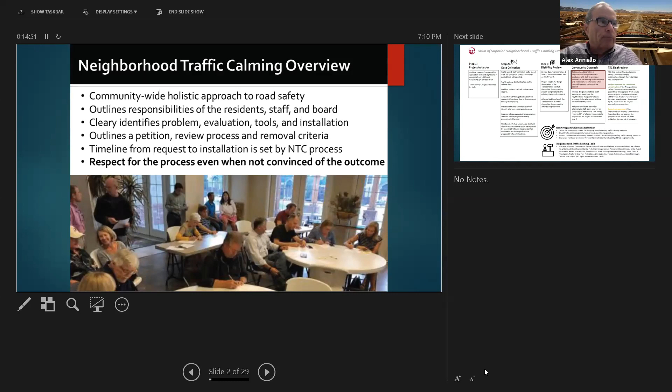I know you're all probably frustrated because you probably started this process well over a year ago and we haven't gotten very far. Obviously COVID got in the way, but we really want to get buy-in from the neighborhood. We don't want to put some devices in and then have an uproar, backlash from people that don't like them. So we want you to help us identify what measures to implement and get the buy-in from your neighborhood. We'd ask for respect for the process, even when you're not convinced of the outcome. We want you to voice your opinions, to let us know if we're on the right track. We're here as resources, facilitators, experts in how to design traffic calming measures and what their effectiveness would be.

So this is the flow chart for the process. It begins with project initiation, and your Stan, I think, kind of spearheaded putting together the petition. So we received that. We collected data last fall. So we've collected volume data, speed data, crashes, all sorts of stuff. We'll be showing that to you in a minute. We reviewed the eligibility based on the speed data, whether this program is eligible. There are some marginal criteria that may or may not have been met. We presented those to the Transportation and Safety Committee back in December last year. They gave us the go-ahead to go out and do outreach with the neighborhood to work with you to come up with a traffic calming plan.

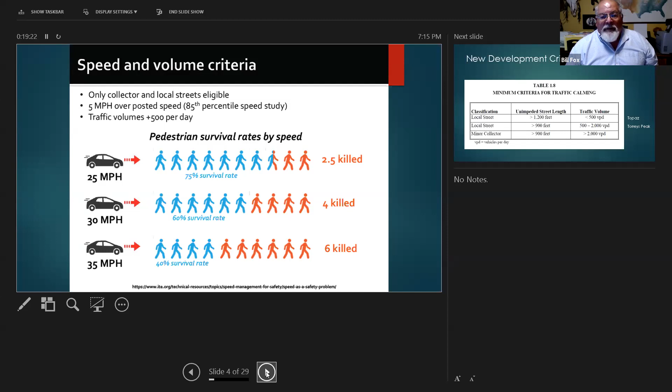The speed is related to kinetic energy. Kinetic energy is a function of the square of the velocity or the speed, so it's not a linear relationship. The faster cars go, you're much more likely to be injured or seriously injured. And so this is why we think it's so important, and you think it's so important, to mitigate speed within your neighborhood.

So just the history of your development there, and in the 70s and 80s and 90s, when the suburban developments were being developed, we had cul-de-sacs. Everybody likes to live on a dead-end cul-de-sac, which means traffic builds on other streets that are called collectors. And we would design speeds. We want to pick a design speed, and often on a local street, we want a 25 mile an hour design speed. Well, we build in factors of safety. So when you do curves and other things, you have a factor of safety. So you end up with a street that you can easily go 30, 35 miles an hour.

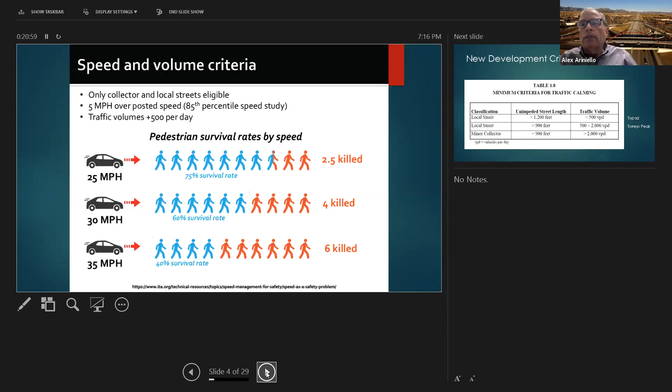You don't have design controls to limit speeds. It's really to allow traffic to go in wet weather and to not lose control and so forth. That philosophy is kind of changing, and people are looking around the country: hey, we need to design streets from the get-go with traffic calming in mind to put limits on how fast you can go. A good example, if you go to downtown Superior, we have a number of design controls. We have all-way stops, we have raised intersections, we have neck downs, we have a number of controls where we've built in the controls to really limit how fast you can go.

This particular graphic is a criteria that we developed about 15 years ago, and actually put it in our design standards to look at unimpeded street length. If you think of some streets, if they're very long and there's no reason to stop, like an all-way stop or a speed bump or a really tight curve, you're gonna get speeding if you get on a local street more than 1,200 feet of unimpeded street length. And then there's some volume criteria, so you really want to look at how long the street is and how can you interrupt that unimpeded length so you force traffic to slow down or come to a complete stop. And so overall, the speeds will stay in that 25 mile an hour range.

Now, you may know of other crashes, but they were probably not recorded in the data that I've been able to obtain. So it doesn't look like you have a significant crash history. But again, we don't want to wait till a serious accident occurs. We want to make sure that we do something that limits speed, to make sure there's protected crossings and so forth.

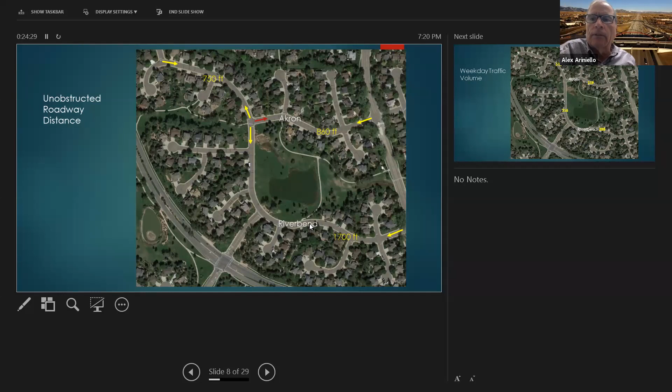On Akron, from Coal Creek to Riverbend, it's about 860 feet. So it's getting close to the 900-foot criteria that we had. And then on Riverbend from Akron over to this other stretch of Riverbend, 1,700 feet. So that one stretch of Riverbend meets our unimpeded length criteria, where we probably want to put something in there to slow traffic down. The others don't, although Akron is getting close.

Our traffic volumes. So we took traffic counts in November of last year.

Okay, if you have a specific question, let me know. So the volumes on Riverbend around the Montgomery Court area are about 510 vehicles per day. That's total of both directions. This is Montgomery Court, right? Right here. Yep. Okay. And then Akron has about 360 in this area where we counted it. Riverbend, 356. That's an average of a couple of days of counts. I'll show you a little more specific breakdown in a minute. And then Riverbend was 280. So the volumes aren't real high.

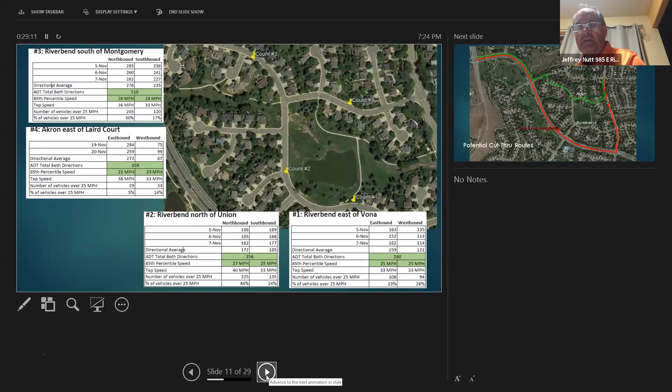Hey, Alex, Jeff Nutt. I apologize. I have to leave the meeting, but I can get the notes from my neighbor Stan. Sure. Catch you on the next one. I apologize for that. No problem.

All right, we're going to talk about, I know Stan or someone had mentioned the issues of cut-through traffic and how people, maybe people from the Amherst neighborhood or Waldona neighborhood, are using it to cut through the neighborhood. So I asked Bill to do a little analysis of whether there is attractiveness for a cut-through route. So Bill, can you go through that, and I'll try to explain all these lines on the

map. Sure. So in this graphic, we asked ourselves, if you lived in the Amherst neighborhood in the upper right-hand corner there where Alex is indicating, how likely would you be to cut through the neighborhood on Akron, say to go to Costco, or would you go down Coal Creek Drive to Rock Creek Parkway and stay on a minimal neighborhood cut-through route? And so we calculated what we thought the time and distance and number of stops and turns would be on both of those routes. And we concluded that the red route, Route 1, was the longer route, but the one that's less likely to be considered a cut through.

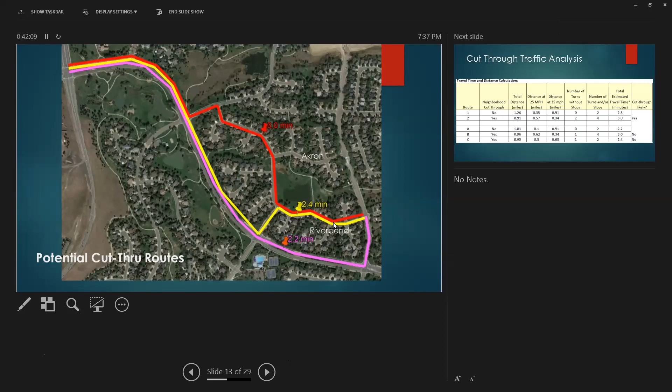Yeah, this is Greg Tan. I'm on that little yellow stretch of Riverbend that we were just talking about. And my observation is that I think there is a bit of cut through coming from the east side of Coal Creek there because of people trying to avoid that stoplight. I can't say how much there is, but I, in particular, know that there's a dude with a really loud Harley that likes to ride at 6 in the morning.

So I know that from my observations, and I can't say how much more there is, but my perception is that people are cutting through to avoid that stoplight because, even though it may normally be resting green, there is a risk, and I feel like people are trying to avoid the risk of getting stopped there, especially if someone has pushed the crosswalk, because that crossing time is really long. So I feel like people are trying to avoid that and just get the easy right turn off of Indiana.

Greg, I've timed that crosswalk. It's only 35 seconds by the school.

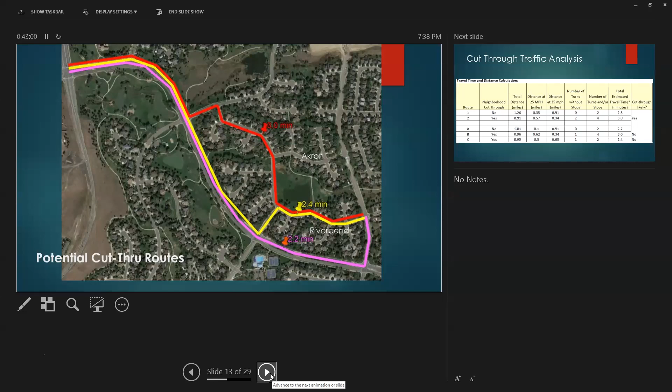All right, let's get to the fun part here. Bill's going to go through a bunch, there's a whole toolbox of tools that you can use for traffic calming. Some may or may not apply to your neighborhood. We've tried to focus on the ones that we thought would apply. We would welcome your ideas as we go through this, but Bill will kind of step through some of these measures and talk about the pros and cons of each one.

So when we think about the tools that are effective in this type of neighborhood, we're trying to get people's attention and build in friction in a sense to slow down folks. And we can do that with vertical treatments, horizontal treatments, or perceptual treatments, or the combination of all three. So when we think about these tools, that's what we're trying to do, is really to build some friction of some sort into the trip through the neighborhood to slow you down.

So one of the tools, next one, Alex, is a raised pedestrian crossing. And by this, we mean it's effectively a speed hump at a crosswalk, but they're designed a little different. They're wider and longer and a little more aggressive than a normal speed hump in terms of slowing effect. But the beauty of them is you can provide the need to slow down at a place where you also are encouraging and might expect to see pedestrians. So we look for locations where a raised pedestrian crossing might be a useful tool.

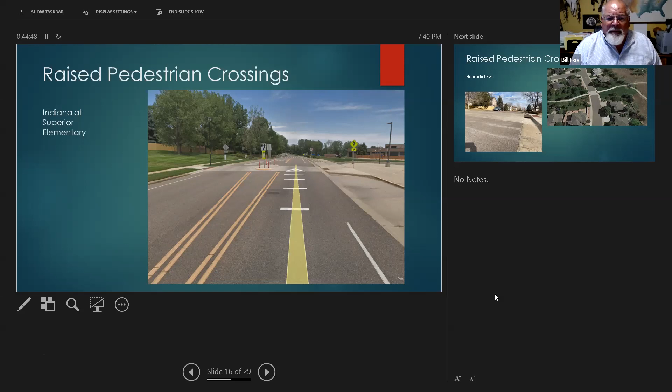Next one. So here's a couple of pictures of those at Eldorado Drive and an aerial view of one on a trail crossing. And so you can see that's a logical place to use a traffic calming treatment.

And then, speed humps are always an effective tool. They're probably some of the cheapest tools, but they don't come without a little bit of baggage, because while they slow you down, the folks that live right there, on either side of the speed hump, probably two homes on each side of the street, are going to hear the suspension noise of vehicles with noisy suspensions. They're going to hear that landscape trailer bounce over that thing with the mowers in the back.

They're going to hear folks on their brakes slowing down. They're going to hear them on their gas speeding up after the speed hump. And so it's important to think of using any of these treatments in a system or a sequence, so that we're not just going to recommend one thing in the middle of a neighborhood. You have to do more than one thing to get people's attention, to get them slowed down, and to keep them slowed down. But here's another example of a speed hump on Castle Peak.

Here's another one on Castle Peak. This one is temporary. It allows you to test the effects of a speed hump. You probably wouldn't do this through the winter. But one thing you can see here is the speed hump is tapered down toward the flow lines or the edges of the roadway where the gutter pans are. And so that allows drainage to occur, and it doesn't affect the drainage in the roadway.

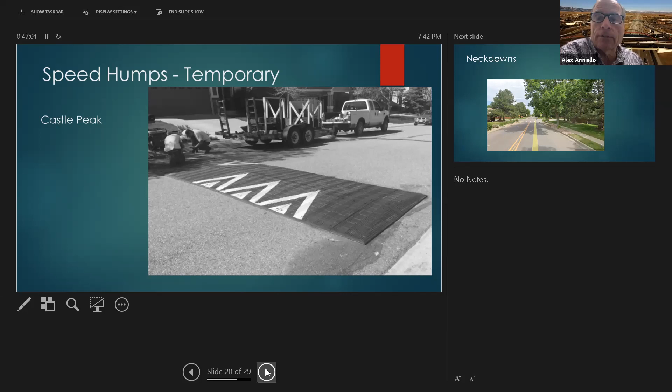So we do own two of these removable temporary speed humps. So if we come down to wanting to test a location or two, this is what we could try. Obviously this year it's getting a little late in the year to do it because they'll get ripped up by our snow plows. But it's a tool that we have.

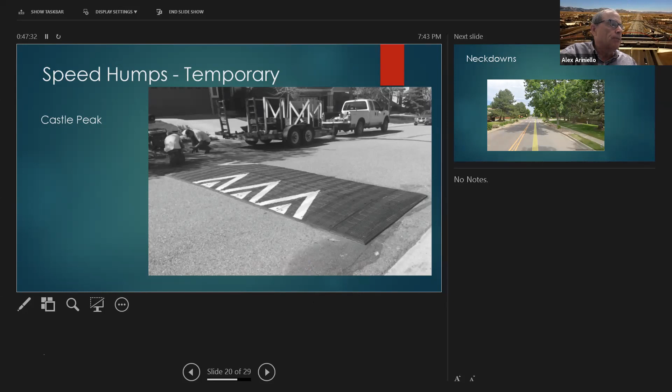And also on Castle Peak, it actually got the neighbors' attention, and we really had to be careful where we put those and negotiate with the adjacent property owners to get a location that was acceptable to them. So the last two tools, the raised pedestrian crossing and the speed humps, were vertical treatments.

This is an example of a horizontal treatment called neck downs, where we're squeezing the road in the middle of a block or on the approach to an intersection. We're necking it down, making it narrower, making it shorter for pedestrians to cross, but we're also telling motorists that the road's not so wide anymore, and you probably need to slow down to get through this pinched area.

Here's another type of horizontal treatment that causes a motorist to move laterally or side to side as they drive through the area. It's an entry median, or a median in the middle of the street that requires a car to wiggle around it, and that has a slowing effect. And in this, let's talk about the chicane effect with the combination of the neck downs and the median island.

Right, and so we talked earlier about doing things in a system of devices. Combining a median with the neck down soon after, you cause this chicaning effect. They have to move to the outside to get by the median, then they've got to move to the middle to get by the neck down, and that combination is effective in slowing down vehicles.

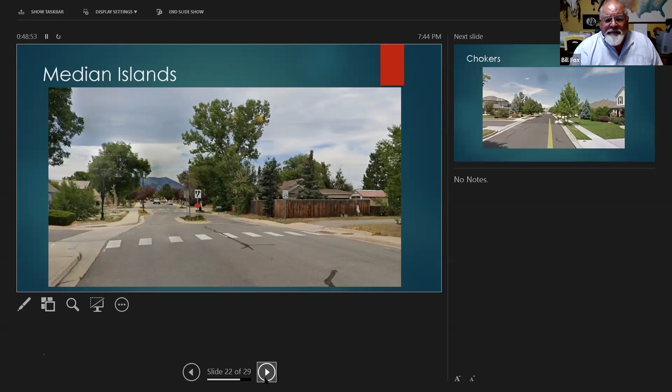Another example of chokers. Same idea, squeezing the roads from the outside in to not only affect their horizontal path along the roadway, but also to perceptually narrow the roadway. People drive slower on narrower roads. What happens with snow plowing in those things? Well, they have to know where they are so they don't run into them, and have to go around them and carry the snow around.

So here's another treatment. You can see it in the picture here, called a speed feedback sign or a radar sign. You're all familiar with them, that tell you how fast you're going as you approach the sign. And some of them flash red and blue when you're going too fast, and can really get your attention. A lot of the people that are going over the 85th percentile speed aren't necessarily trying to speed. Some are, not arguing that, but some are just not paying attention.

And our cars are pretty efficient at going fast. And so you can go too fast without even realizing you are. And these devices can get your attention and get some people to slow down. They're not as effective as some of the vertical treatments, but they certainly can help.

Bill, I have a question for you. Yes. What about other signs like stop signs? So I'll give you my opinion on stop signs. And I'm not saying you can't effectively use stop signs to control speed. We typically recommend trying not to use stop signs as a speed mitigation device. Stop signs assign right-of-way between the different approaches, and we want them to be as effective as possible to do that.

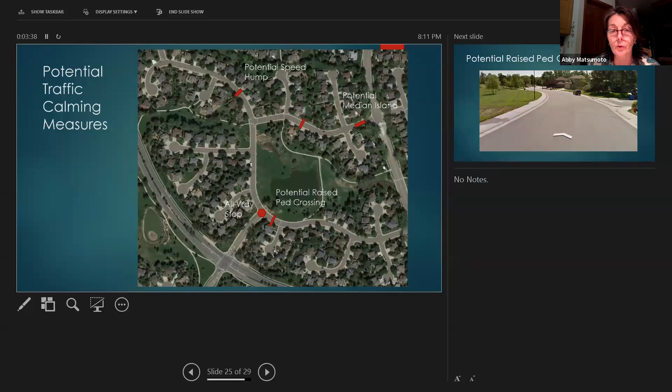I'm against the speed hump there. If you move it up to by the crosswalk, I may be for it. You want us to neck down, do some protection here? Yes. I agree. And like Greg says, right where that speed hump would go, we do have a lot of problems with very heavy ice buildup, and that seems like it could contribute to it. And there's lots of people who blow through that three-way stop sign at Akron and Riverbend too. So having something not too far from that would slow them down.

What about the idea of a raised pedestrian crosswalk where Alex has his pointer right now along that trail, as opposed to the speed bump just to the right? This home here, we don't have a driveway right here. Driveway's over there. Correct. It's in the cul-de-sac. Yes, their front door is on Akron, but the driveway is on the cul-de-sac. Okay. Can we relocate this and maybe get it in this area here? Maybe just realign that trail, or is there something in this spot here? Is there a big tree, or can I move it?

There's some big pine trees there, and the crosswalk that you guys painted in there a while back is quite effective. My wife and I have walked across that street there, and cars will stop for you if you're standing there on the sidewalk most of the time. Okay, so this could be a good location for a raised pedestrian crossing. Yeah, and you already have it marked as a pedestrian crossing, and people have probably gotten used to that. Yeah, Alex is trying to move it a little bit away from the intersection so that people aren't turning around, making a 90-degree turn up and over the top of this raised crossing.

I get it. Thanks for clarifying that. If we could kink it a little bit and get it a little bit away from that intersection, I think a raised crossing could work right there. Okay, so this moves over to here at its raised crossing.

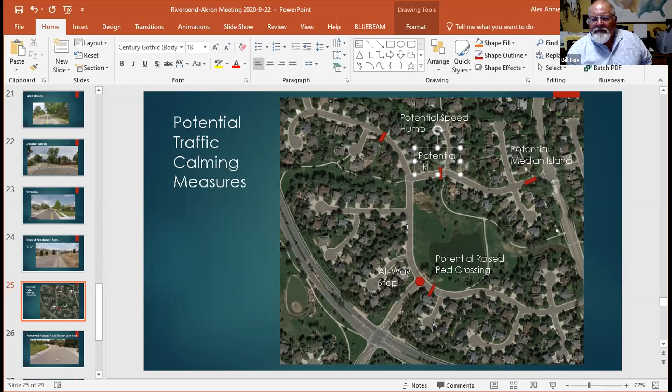I'm just modifying my drawing here, so I'll get back in a minute.

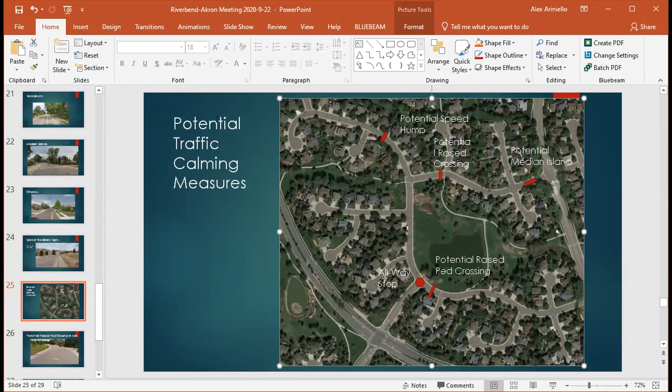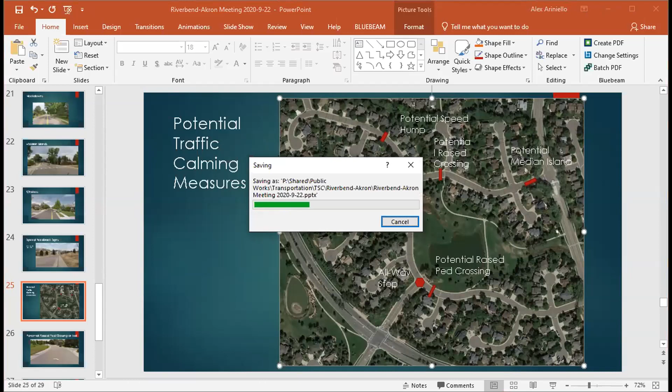Yeah, I think the other thing we talked about was that all-way stop down at Indiana and Riverbend there, and probably doing away with the potential raised pedestrian crossing. It seems like an all-way stop at that intersection is necessary because there are just so many little kids going to school. When you're sitting there and watching people, some people stop, some people don't. It's fairly shocking.

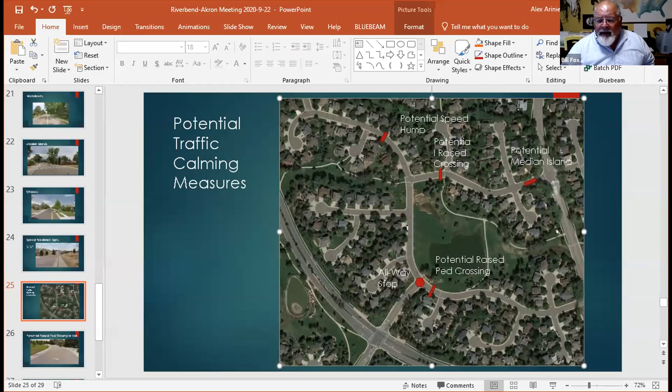So that all-way stop, Alex, as you mentioned, would include curb ramps and crosswalks so that pedestrians, the kids we've heard about, can cross through that area from the park over to Indiana toward the school. Right. Aren't they already ramped down on the south side of Riverbend there, bracketing Indiana? If you did one or two crosswalks going across Riverbend, that would be where you'd have to do your ramping, right? Right, okay. Yeah, the ramping across Indiana is there, Alex. It's just the ramps on the north side. Yeah. Okay.

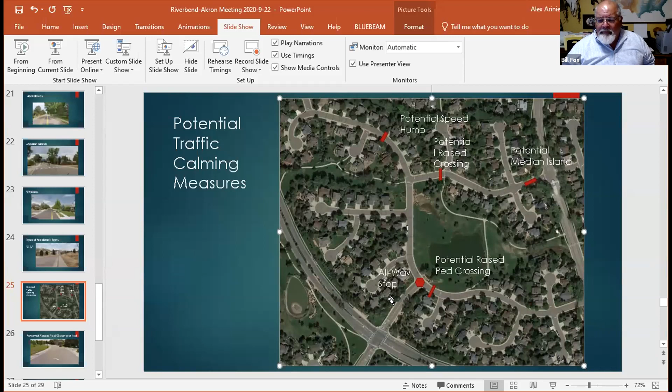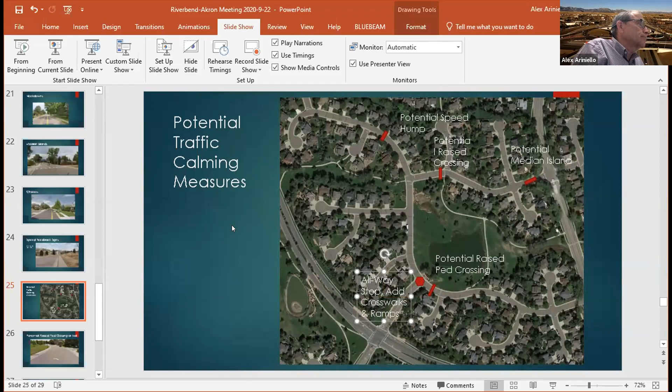Second that, okay. Yeah, I'm glad we're talking about that all-way stop there. That's just an awkward turn, especially when you got kids kind of coming in towards school.

Are you talking about the ped crossing on Akron, Alex? Yeah, am I not sharing this? Do you see my screen? I don't see your cursor anymore. Okay, so let me just try it again.

I'm sorry, here it is. There you go. So right here, yeah. So maybe enhance that crossing. I think the suggestion was maybe try the median to the right there first, and then see if it's still necessary to do the raised crossing.

Yeah, I would argue that if you do the entry median over there by Cold Creek, by the time you get over there by the ped crossing, you haven't slowed them down. I mean, I would think you'd want to do something in the vicinity of that ped crossing, whether it's neck downs or the raised crossing, one or the other.

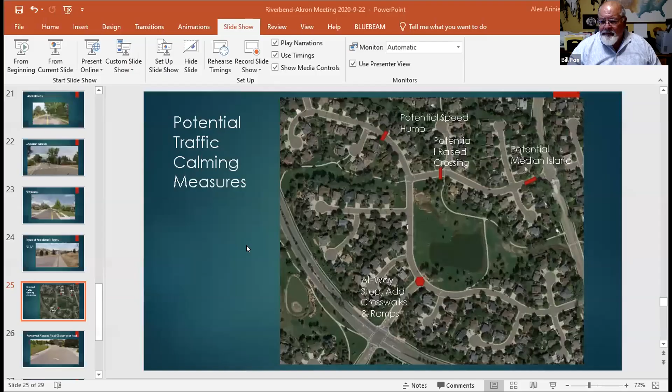Okay. So if these measures that we're talking about on Akron and the northern portion of Riverbend are successful, have you made a judgment about what the alternative route will be? Are you expecting people to go all the way to Parkway, or are they going to start using that yellow route through the southern portion of Riverbend to Indiana? Bill, you want to try that? Well, I would answer to say, are we done? Are we not going to do anything to Riverbend between the all-way stop and Cold Creek Drive?

I mean, that's a fairly long stretch with gentle curves. So if we don't do anything in that stretch, then I think that yellow route may be fairly attractive. They still will have to stop as they're westbound on Riverbend to turn left onto Indiana. That will slow folks down, but it still may be a way to bypass the school zone and the effect of that signal out on Rock Creek. So I'm not sure that this prevents the yellow route.

So Bill, you said earlier on one of the charts that from Cold Creek along Riverbend to Akron was about 1,700 feet. The all-way stop was probably around 700 or 800 feet. So that gives you 1,000 feet or so unimpeded between Cold Creek and Indiana. Yeah, I'll try to measure that for you if I can get back to it. Yeah, I think I saw 1,700 feet on the chart. Yeah, it was from Cold Creek to Akron. Right. But now we put this in, so we've shortened this to probably 1,000 or so, maybe 1,100. So yeah, it's about 1,100 from the all-way stop over to Cold Creek on Riverbend.

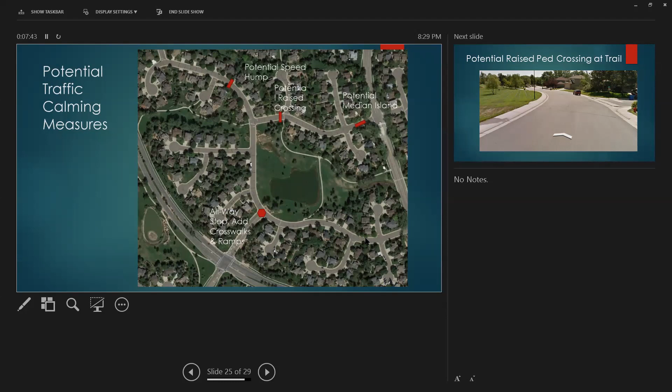Alex, just kind of a slight side path here. What does the budget profile look like for some of these things getting done for next year? Well, we have $50,000 a year budgeted for traffic calming. Okay. And then we met last week with the Yarrow neighborhood and got some of their input. So they're a little bit ahead of you, but not very far.

This isn't too, obviously this is low cost, but the ramps are something that we probably take out of our street maintenance budget. It's more pedestrian protection, and they probably should have been there from day one. So I wouldn't count those. That's probably going to be 20 or 30,000. We won't do much here, and then a speed hump, maybe 15,000. So right. Could easily eat up the whole year's budget. Thanks for the insights into the costs and what have you. Mm-hmm.

All right, let's talk. I know it's getting late. We promised that we're at the end of our time. I just want to go over next steps. I think what I'll do is develop a kind of interim plan that we just talked about, and then more a long range plan, adding those two raised crossings, maybe that other speed hump. Take that. We have a meeting with the Transportation Safety Committee on October 5th, so we can report back.